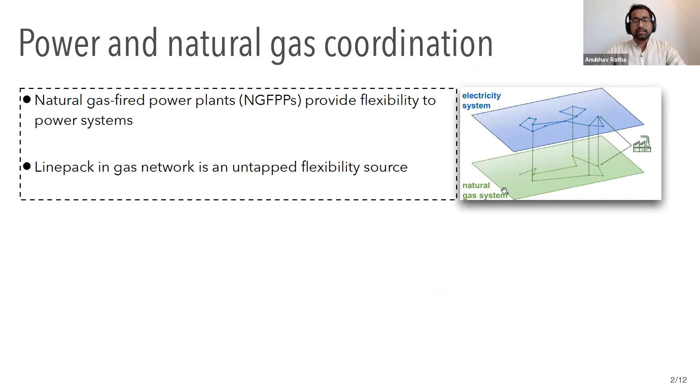To understand how Linepack works, let's look at this model of a gas pipeline. Here we see the two nodes of the gas pipeline, node M and node U, and they have a flow QMU which goes through this pipeline.

The pressure variables PRM and PRU denote the nodal pressures, and these are usually the quantities bounded by a physical limit. If you look at this graph above the pipeline, the pressures at the terminal nodes can actually be modulated within their bounds such that we can follow any path for the flow within these two bold, thick black lines, and we'll have the same flow, but rather we can have different amounts of gas stored within the pipeline.

The shaded area between these two curves is called Linepack flexibility, and that is, in steady state form, given as a function of the average pressure at the terminal nodes.

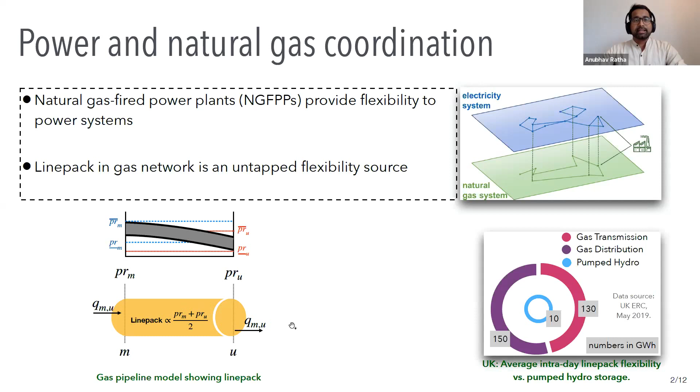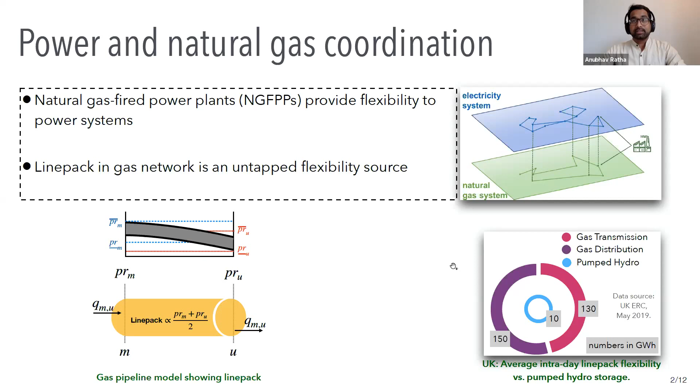In absolute numbers, the amount of flexibility in Linepack available across the whole of UK is about 28 times larger than the pumped hydro storage, and this huge amount can be harnessed simply by coordination between the power and gas systems. And that is what is happening in recent years.

If you look at power systems across the world, renewables such as wind and solar energy have been displacing coal, and they are supported in this effort by natural gas fired power plants, which are fast acting and flexible. While this is quite good for the environment, it also leads to more complications in the coordination between electricity and gas systems. First, gas operational constraints become more and more relevant in the day-ahead power dispatch problem, which was not the case before.

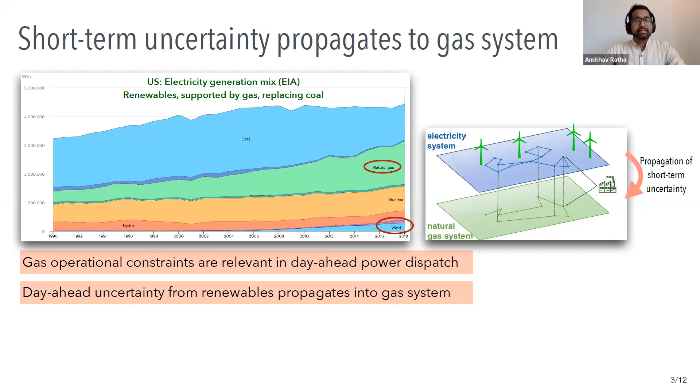Secondly, short-term uncertainty propagates from the power system side to the gas side. This often results in fuel unavailability across the gas grid, and it can also put the reliability of the gas system at risk. As a result, it can also hamper the amount of flexibility that we can extract from the gas side to the power side.

Studying this uncertainty propagation is quite relevant because it opens up pathways to endogenously value the flexibility that can be provided by the gas system to the power sector. This valuation can then in turn be used to design new market-based coordination mechanisms or new market products. That is the ultimate focus of our research.

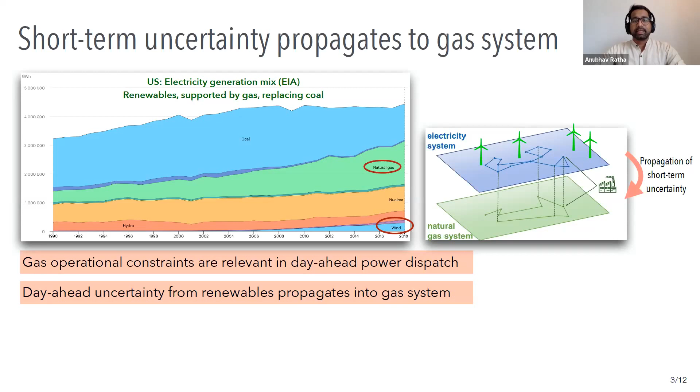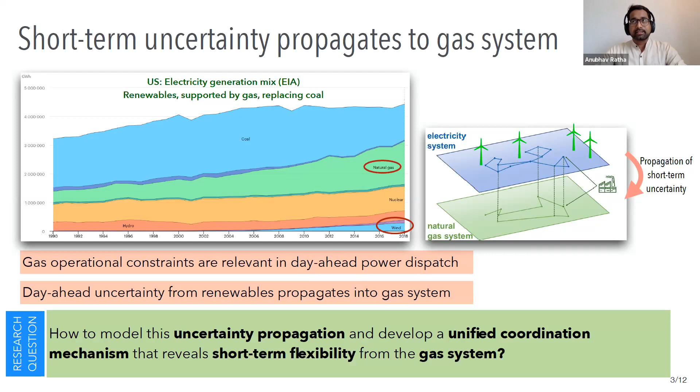However, at first we would like to study this uncertainty propagation, and that is the topic of our discussion today. The research question that we study is: how do you model this uncertainty propagation and develop a unified coordination mechanism to reveal this short-term flexibility from the gas system to the power system? The answer to this question actually lies in doing stochastic power and gas dispatch.

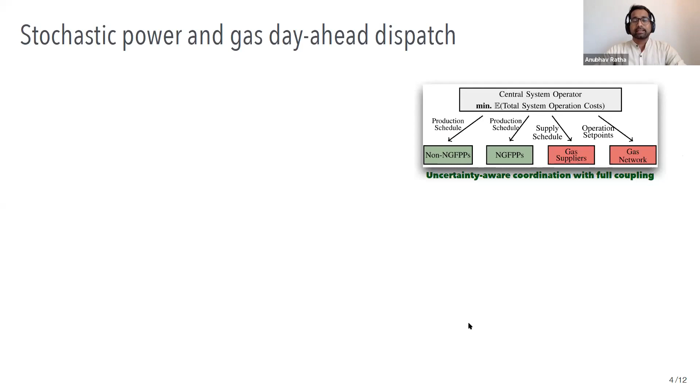In our model, we consider a fully coupled power and gas system such that the central system operator dispatches both the power and the gas system agents. In a generic form, we can write this joint optimal dispatch problem like this.

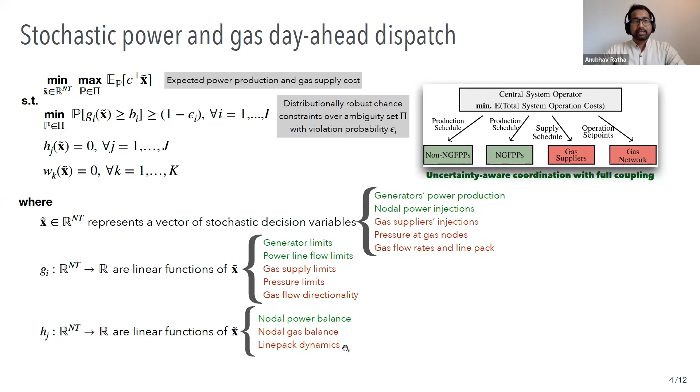Finally, we have functions W, which are non-convex quadratic equality constraints. These are known as the Weymouth equations, and they govern the physics of steady state flow of gas in a pipeline as a function of difference in squares of pressures at the terminal nodes.

There are two issues with the current form. The first is that the variables are stochastic, which means the constraints are infinite dimensional, rendering the problem unsolvable. Secondly, there's non-convexity in the problem due to these Weymouth equations, and they need to be convexified to ensure we reach global optimality.

Let me now discuss how we tackle each of these problems.

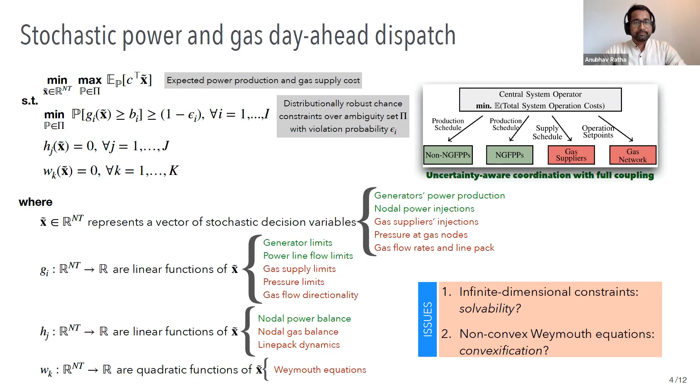First, to ensure solvability, we adopt moment-based ambiguity sets in our problem. We assume that wind farm forecast errors are a source of uncertainty, and we define an ambiguity set Pi which contains all probability distributions with a given mean and covariance. We assume that the mean and covariance is available from analysis of historical forecast errors in a given area.

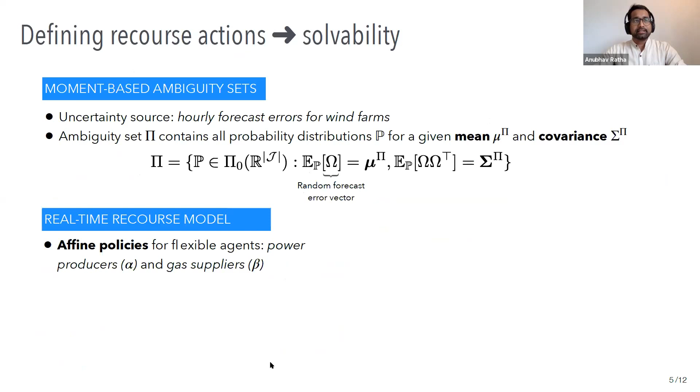To mitigate uncertainty in real time, we adopt recourse actions in the form of affine policies. Optimal affine policies are obtained already at the day-ahead dispatch stage, thereby reducing the cost of redispatch during real-time operation. I'll illustrate the affine policies through a simple power network setup here.

Here we have 2 wind farms, 3 flexible generators, and 1 inflexible load. During the real-time operation stage, the wind farm production W tilde is given by the wind farm forecast, W hats, as well as some random realization that happens, which is omega.

Depending on whether there is a surplus or a deficit in the system, flexible generators increase or decrease their production such that the overall system is balanced. The 2 equations ensuring supply-demand balance are given here: the first ensures supply-demand balance in case perfect forecasts are realized, while the second ensures exact activation in any other case. As a result, the overall system is balanced in the real-time operation stage.

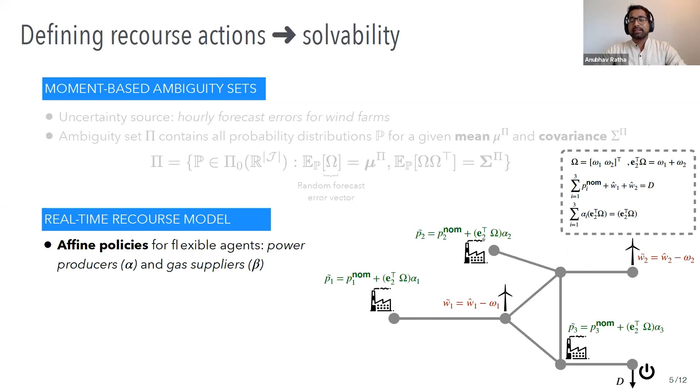This technique has been quite popular in designing control systems resilient against uncertainty. In our problem, we also assume that changes in power and gas network flows can be approximated through affine functions, and this is something we are planning to extend in our future work.

So, adopting these recourse actions and then using this well-known analytic reformulation of chance constraints given by Chebyshev's inequality, we convert our infinite dimensional chance constraints into convex second-order cone constraints.

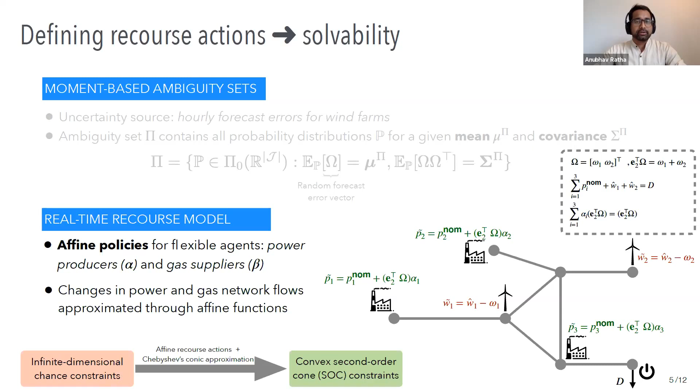Now, to handle the non-convex Weymouth equations, we define auxiliary variables gamma and rho, which are sensitivities of the gas flow and the nodal pressures to uncertainty.

Then we separate the terms of the equality constraint by expanding it, and we obtain 3 different equality constraints, which are terms that are independent of the uncertainty and quadratically as well as linearly dependent on them.

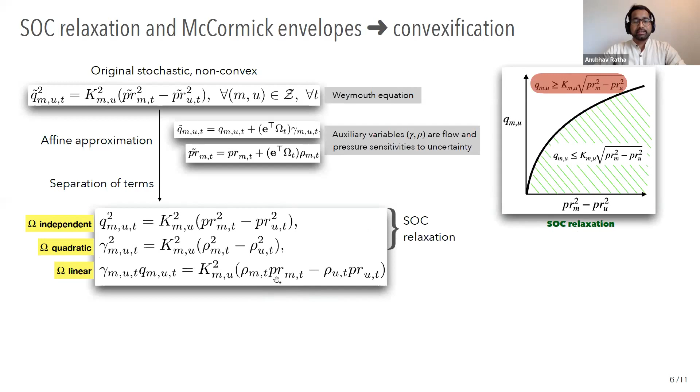Now, the same strategy cannot be used for the last equality due to the presence of bilinear terms, as you can see. So we replace each of these bilinear terms by their McCormick envelopes, and we convexify this constraint as well.

So adopting these two steps allows us to convert the non-convex Weymouth equations into second-order cone and linear constraints, making the overall problem convex and solvable.

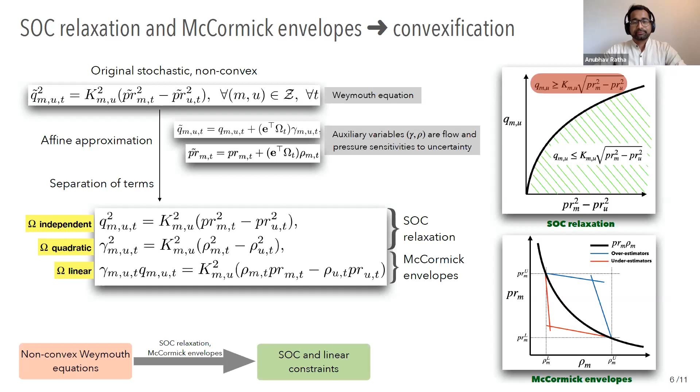In the end, we obtain the final tractable form of our original stochastic problem. It is a second-order cone program that is solvable quite efficiently by off-the-shelf commercial solvers.

And in a nutshell, the way the model works is that we have mean and covariance of the forecast errors, which are extracted by the central system operator from the historical data. And they're used by the operator to not only assign an optimal dispatch schedule to different agents, but also optimal flexibility procurement is reached with in the form of affine policies.

The parameters here, epsilon, are chosen such that they indicate the risk preference of the market, of the system operator. And naturally, 1 minus epsilon is the confidence then the chance constraints hold.

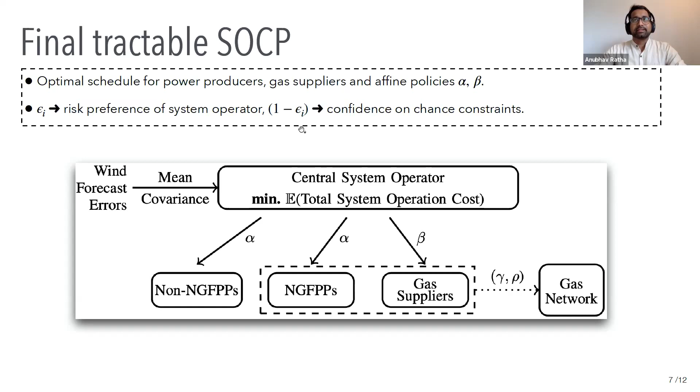To test our methodology, we selected the IEEE 24-bus reliability test system, which is coupled with a fictitious 12-node gas system. 7 out of the 12 generators in our system are gas-fired, and we have 2 wind farms, and there are 3 gas suppliers in the coupled gas network.

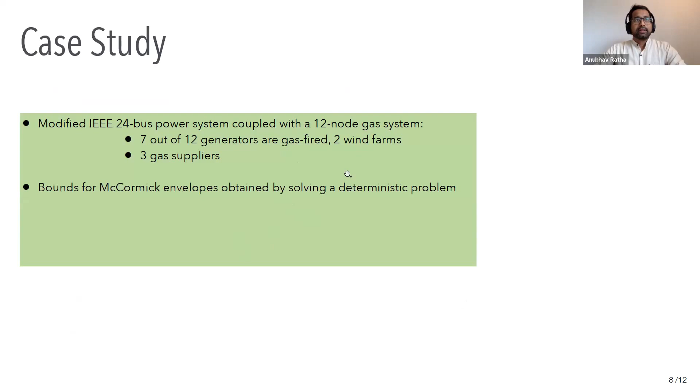We obtained the bounds for defining the McCormick envelopes by solving a deterministic version of our problem. And in that deterministic version, we assume that perfect forecast of wind farm production is realized.

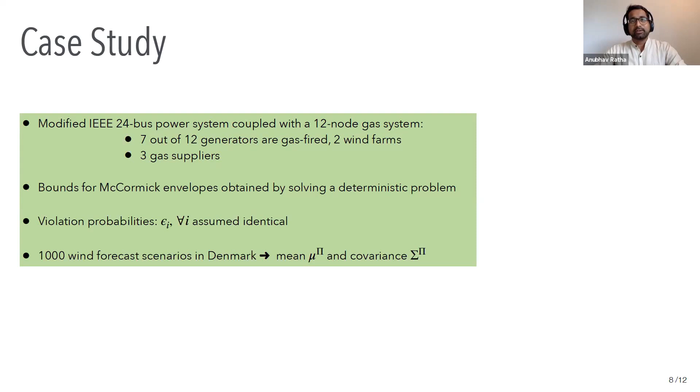We assume that all the violation probabilities for the chance constraints are identical. And we finally use 1,000 wind forecast scenarios collected in Denmark to obtain and estimate the mean and covariance, which is used by the system operator.

The figures here show the coupled power and gas networks, and gas-fired power plants that couple these two systems together are shown in these red rectangles.

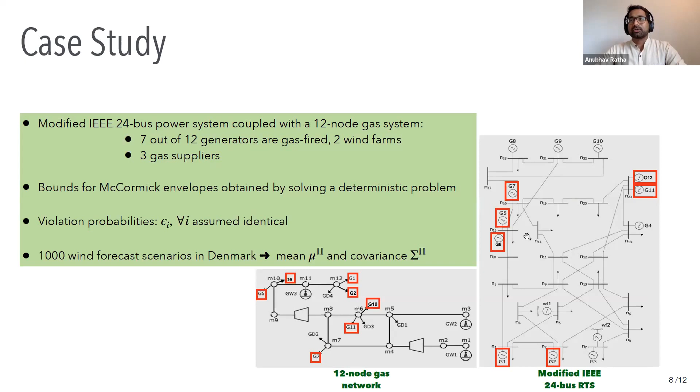Coming to results now, the figure here shows the optimal dispatch schedule and the affine policies for the power generators, which are grouped into gas-fired and non-gas-fired power plants.

We observe that in the hours when specific generators are not dispatched, or if they're fully dispatched, then they are not assigned any affine policies. Similarly, lower cost of flexibility is preferred also for the gas suppliers.

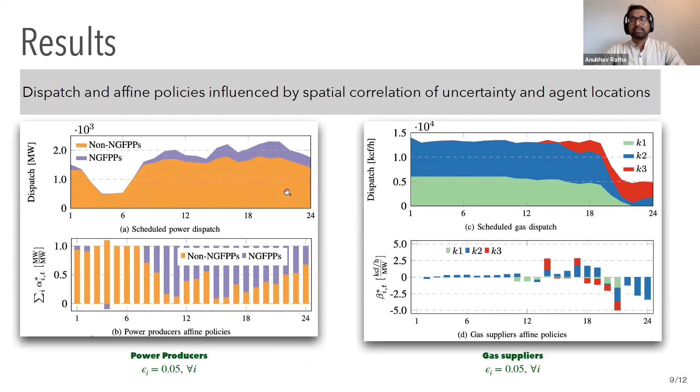On the gas side, we also observe that the gas injections are made highly in the hours in the beginning, such that the gas-fired power plants can actually extract gas from the system in the later hours.

To test the exactness of the convex relaxations, we also used a metric which we call normalized relaxation gap. And this metric allows us to evaluate the exactness of our relaxations.

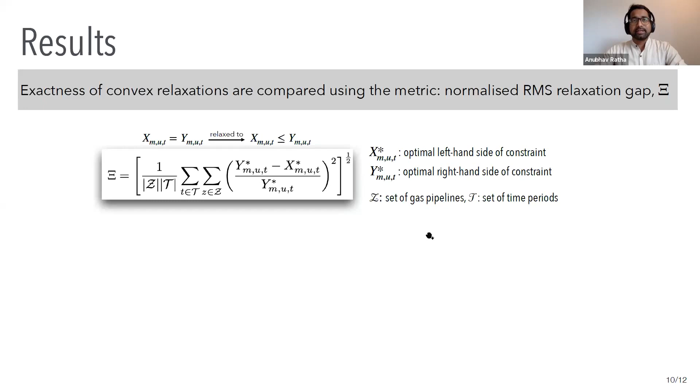And we observed that the exactness obtained for the second-order cone relaxations for the terms which are quadratically and independent of uncertainty are actually satisfactory for this case on the left. And the remaining inexactness can be actually attributed to the nature of the gas network, which is non-radial in our case.

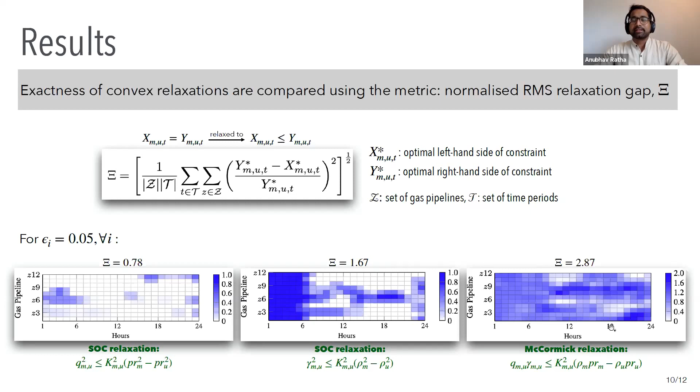For the McCormick relaxation, because we obtained the bounds quite trivially, we observed that the relaxation is quite loose. And in fact, for some hours, we have adverse negative values of these bilinear terms that are obtained. And as a result, the normalized gap is actually exceeding 1.

Lastly, we also did some ex-ante simulations to evaluate the value of the quality of our solution. And we observed that...

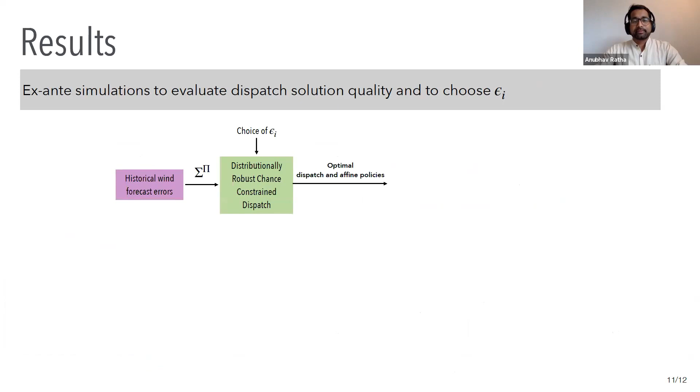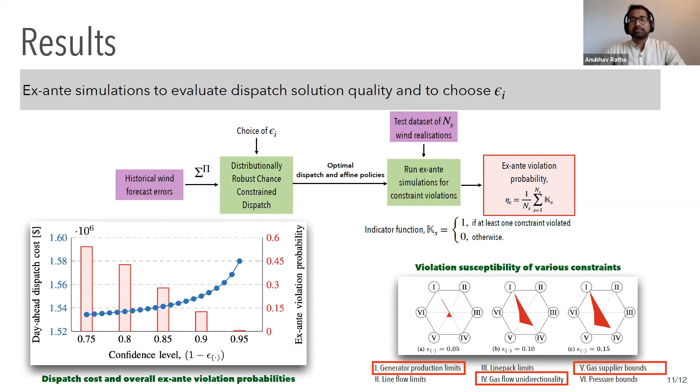Finally, to conclude, in this work we performed a tractable reformulation of stochastic joint power and gas dispatch based on affine policies, and we showed that cost-efficient dispatch and flexibility procurement from a variety of sources can be done, keeping the spatio-temporal uncertainty in mind.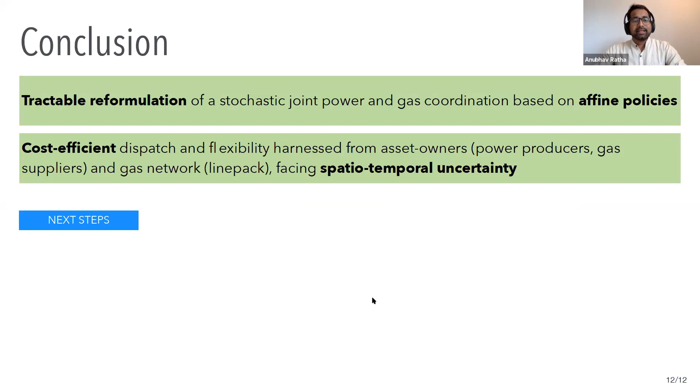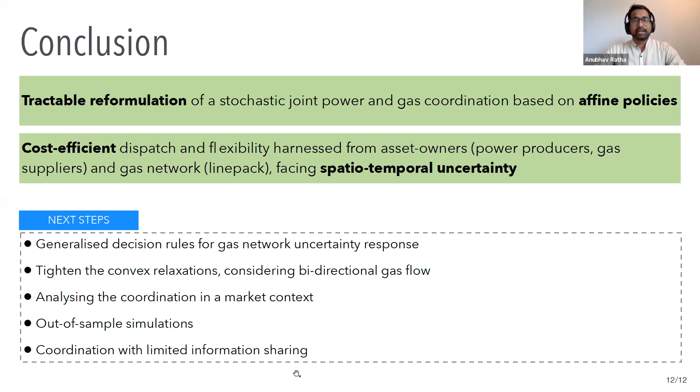As a next step, we would like to consider generalized decision rules for our gas network uncertainty, and we'd also like to tighten the convex relaxations using iterative algorithms or other techniques. It would be nice to extend this coordination in a market context, which is a natural next step for this work. We would like to perform out-of-sample simulations to evaluate and provide guarantees of optimality and feasibility, and finally, limited information sharing also makes this problem more relevant to the real-world market case. Thank you for your attention, and I would be happy to answer your questions now.